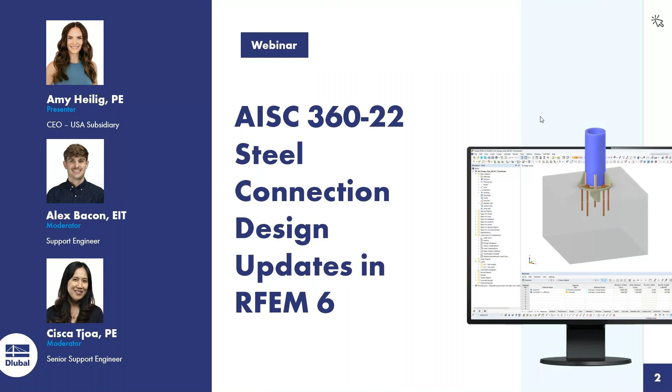So regarding the content over the next hour today, I do want to give a brief introduction to the Steel Joints add-on for connection design within our program RFEM 6. We'll talk about several of the new features and design options available, and then we'll move on to our examples. The first one will be a steel carport. We'll go ahead and design several different connections showcasing some of those new features.

Our second example is going to be this steel platform shown over here on the right-hand side. So throughout these two examples, we'll talk about the connection component and data input. Of course, we'll run the calculation and take a look at the analysis and design results as well.

So for those of you joining today that are not familiar with our program RFEM, we do work with this add-on concept. So RFEM is the base program. This allows us to fully model our structure, whether it's steel or some other material type. We can integrate with BIM software and we can get a full static analysis. But when we want to carry out the design of our steel members according to the AISC or the CSA standard, we will need the additional Steel Design add-on.

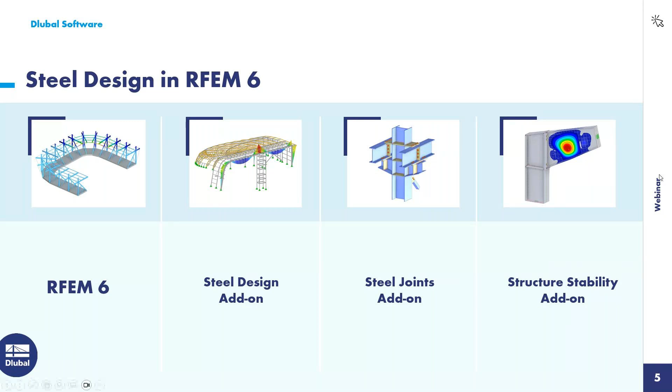So we'll give a brief introduction to the Steel Joints add-on. Now, I'll preface that this will be very quick just for what we have time for today, but there is a previous webinar that is linked here in the PowerPoint that will go into a little bit more detail of the basic functions within this add-on for new users. So you can certainly refer to that here.

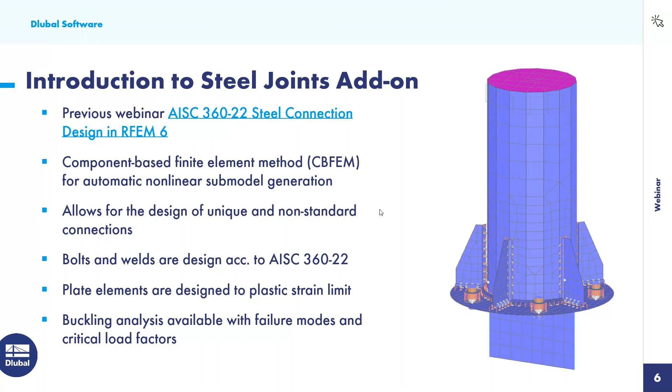The bolts and the welds are designed according to the AISC 360 standard, while the plate elements are code independent, but they're designed to the plastic strain limit. Now, as mentioned, the buckling analysis is also available where we can take a look at the failure buckling modes and the critical load factors and determine where we maybe need to apply stiffener plates.

So we might be wondering, what are the benefits of this particular add-on over other connection design programs? So within the RFEM 6 Dlubal Center, we have access to an extensive library with standard connection components. This means that if we do have a pretty basic connection, we can always go to our library and insert these components automatically to apply to our model.

But we can always build up our own non-standard connection type as well with individual components. We'll certainly see these two options in our examples today. We can save that then to our library for future RFEM use. We really pride ourselves in having a transparent output of our design checks.

So within the welds and the bolts, for example, as you can see over here on the right-hand side, you can see a line-by-line output of the code equations, the code references, and ultimately how we determine that design ratio. But even more so, you can actually download the submodel that we've generated underneath the hood for this connection and open it up like we would any other RFEM model.

We can also calculate the true connection stiffness, so the axial and rotational stiffness of this connection, and we now have the ability to automatically export this stiffness back out to the global model in RFEM for the member end fixity.

And finally, this leads to the design of the members and the connections in one file. We no longer have to export out member end forces to a third-party program every time the model updates and re-export out those forces, but rather everything is working together again in one file.

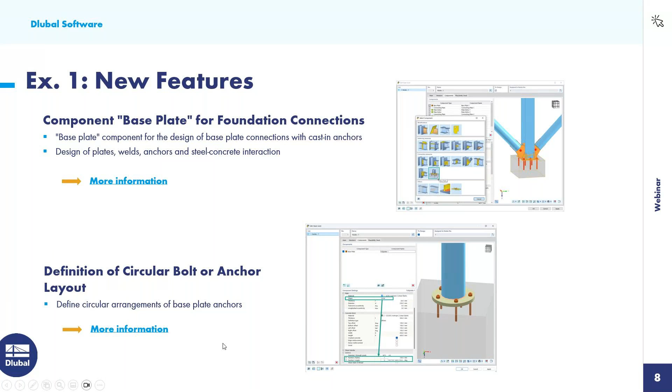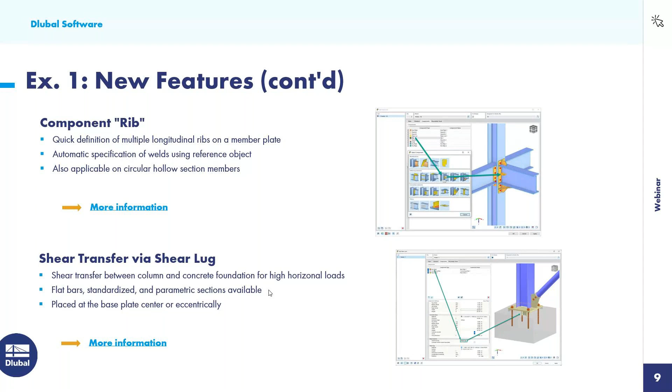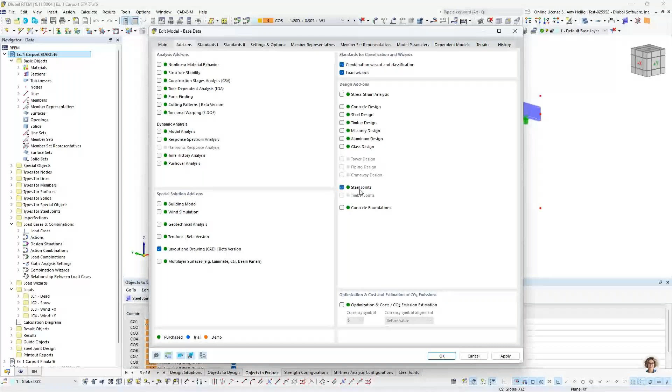Okay, so we'll go to the program RFEM here to begin our first example. So before we begin, we are in our base data dialog box. This would be the initial dialog box when we create a new model, and under the second tab are all of the various add-ons that we have available in addition to the base program. And for this initial example, we do want to activate here this Steel Joints add-on. So jumping to the third tab, this is where we can set our standard. You can see here the AISC 360, the latest 2022, is available here.

So now we're within the main program RFEM, where I have already taken the liberty here to model this general steel structure. And this might be some type of carport where we have our columns supporting the steel structure up here at the front, but maybe in the rear, you'll notice some nodal supports here. Maybe this carport is attached to an existing building, such as a concrete wall. And just general AISC cross sections as well as materials have been applied here.

So we'll take a quick look at the loads as well. So you'll notice that I'll display our dead load. And if I right click here to display separately, this has just been an area load that has been applied through the load wizard over here in our navigator, where I can also right click to display separately to see those loads applied to the members based on their tributary area. A couple point loads as well for this particular load case.

Snow load, same concept here, just an area load. And then you'll also see here a couple of wind loads. These have been applied to these nodes that appear to be kind of floating out in space here, just to define the wind plane in both the X and the Y directions.

But again, using this load wizard, we have applied this load to an empty or an open structure, so we want it to only be applied to the cross-sectional area of these members themselves. And again, we can right-click to display these loads separately for wind in the X and wind in the Y.

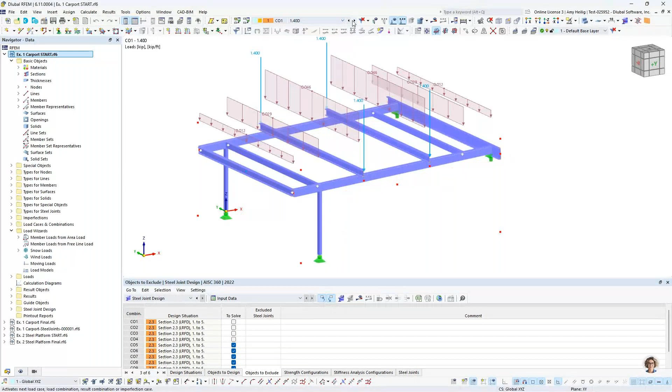All of these loads are combined according to the ASCE 7. We can see them displayed together here and taking into consideration the factored load combinations. So now that we have done a quick model review, we want to begin with our first connection.

So because we have enabled the steel joints add-on, we have a folder option over here to specify our first steel joint by right-clicking and creating a new definition type here. So the first thing to do in this dialog box is to select the nodes.

We want to go ahead and do a base plate design. We'll select the node at the base of the column, but if we want to do an identical design at the base of the second column, we can select both nodes at once. They don't necessarily need to be defined separately here.

So you can see that the program inputs in the members. For this one, we only have one vertical member. We'll call this one the columns. Under the members tab, again, we just see those vertical members and the relevant cross sections and materials brought in.

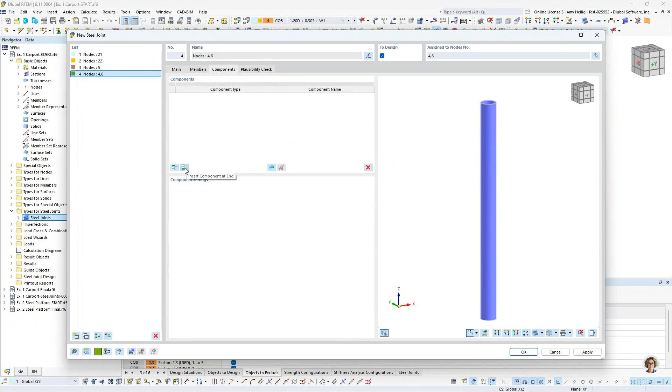Under the third tab, this is where we begin to build up this connection. So we will insert in a new component here from our component library. And one of the new features mentioned in the PowerPoint is going to be a base plate.

So when we insert in this component, we see it shown graphically here, but all of the information at the bottom will need to be revised to account for different materials and different geometry that we want to make for this particular connection. So we'll begin here with the base plate itself.

We want to select the steel material A36 that's already been defined here within the model. If we needed to, though, we could always visit our material library within RFEM.

So we access the material library here. We use our filters over on the left to filter to AISC, and we see all of the relevant steel materials if they haven't already been defined. But in this case, it has, so we can simply select it from our drop-down box here.

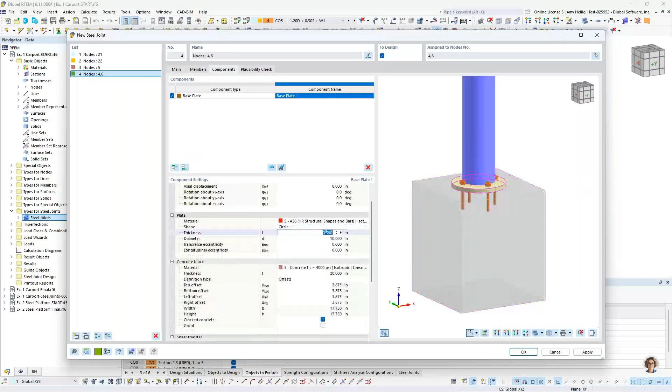Now, rather than a rectangle, we want to modify this to a circle. And the thickness of our plate will be 0.5 inches. The diameter will remain at 10 inches.

And then we're ready to jump down here to our concrete block. So the concrete block material is 4,000 PSI. The thickness is going to be modified to 18 inches.

Now, rather than defining offsets, I'm going to toggle this to defining the dimensions and position directly. So this way I can set the width here to 24 inches. The height will also be 24 inches. We can set an eccentricity, but we'll go ahead and set this as 0.

Now notice we also have the ability to turn on or off if the concrete is to be considered cracked. And with the cracked concrete, this is just going to affect the modification factors that will be used in our design of our anchor, specifically for anchor concrete breakout. We'll go ahead and leave this cracked for today.

Now we also have here the grout that we could turn on or off if we had a grout layer in between the plate and the concrete block.

Under the shear transfer, using this drop down, we can select our new option here to define a shear lug. Now, additionally, I could specify if I wanted to consider friction under the base plate, so if I wanted that base plate to take some of the shear forces. Otherwise, if I leave this unchecked, we'll see most of the shear forces within the shear lug itself.

So as far as the material for the shear lug, we want to select A36, again, available in our dropdown, and we do need to define here a new cross section.

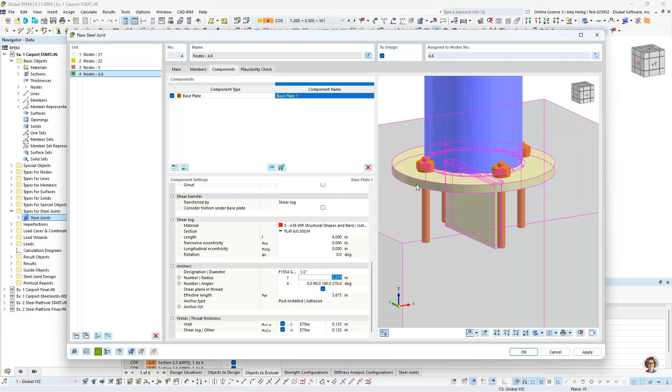The spacing, though, you'll notice we have an issue where it's colliding here with the wall of our HSS member. So therefore, we want to modify the radius to 4 inches, and now we see that anchor move outside that area.

Instead of a total number of 4, we're going to increase this to 5, and the program will automatically space these evenly around the circumference here of the base plate itself. So that all looks good.

We want to define whether the shear plane is located in the thread or not. We can go ahead and uncheck this for today. And we can also modify the effective length of the anchors themselves if we'd like to 8 inches.

Finally, we have the ability here to define the throat thickness. This would be the weld from the HSS to the base plate itself, and we'll go ahead and set this as 0.177 inches.

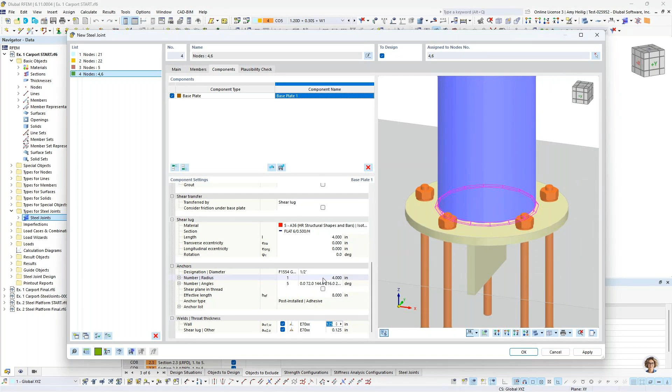A nice trick in the program is if I hit the down arrow key and simply hit F8, that's going to copy the cell above into the current cell. So that might just be a nice quick time saver for you as well.

Now we want to insert another component here to this connection type, and this is where we're going to take advantage of this new component rib that we also mentioned in the PowerPoint. The stiffened object is going to be the member plate, and within our dropdown, we want to select the column wall. The type of reference is also going to be a plate, and we want the reference to be the base plate itself, that circular base plate.

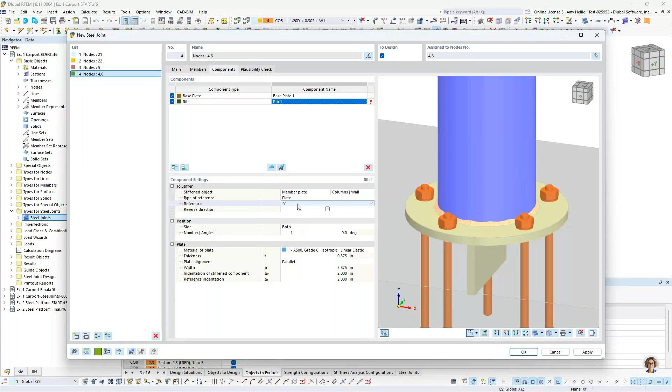We see here that that first rib was automatically generated, but clearly we need to make some modifications here to the geometry and the placement.

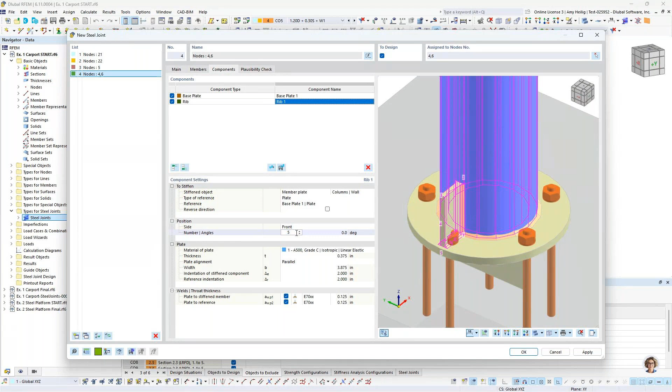So we want to create these ribs, and you'll notice the default here is to set this on both sides of the HSS. We only want to set this on the front side, so we'll go ahead and make that change here, and we want a total number of 5 ribs. The program will create the 5 ribs, but again, we have conflict here with the location of our anchor bolts.

So we'll go ahead and set the first angle at 36 degrees, and if I just simply hit enter, the program's intelligent enough, again, to space those ribs out evenly between these anchors. Now, the plate element would be, again, A36 for this rib.

We could modify here the thickness to 0.25 inches. Rather than being a parallel rib, we can use our dropdown to change this to inclined. With the inclined, we see the geometry update graphically, but we need to modify the width to 4 inches. The height will be set to 2 inches.

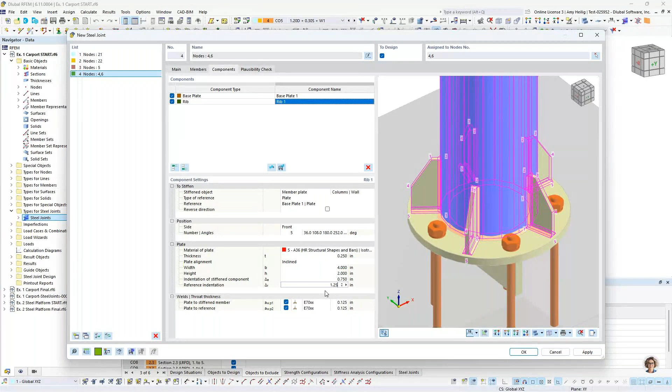And then we have the indentation of the stiffened component. We're going to modify this to 0.75 inches, and the reference indentation is going to be 1.25 inches. Finally, our last input here is going to be our weld throat thickness. We'll modify this to 0.177 inches.

Again, using that F8 key, we'll go ahead and copy that down to the second cell here. So that will be all that is needed for this first connection design of our base plate. Again, we could save this to our user-defined library and always reference it at a later time for a future RFEM model.

But going into the graphical display here, back into RFEM in the global view, we can control whether we're seeing these connections globally here in the graphical view with this button in the upper right-hand corner. So currently I have this set to no joint model, but we can toggle this down to a detailed joint model, and sure enough, what we're going to see here is the display of the base plate that we have just defined.

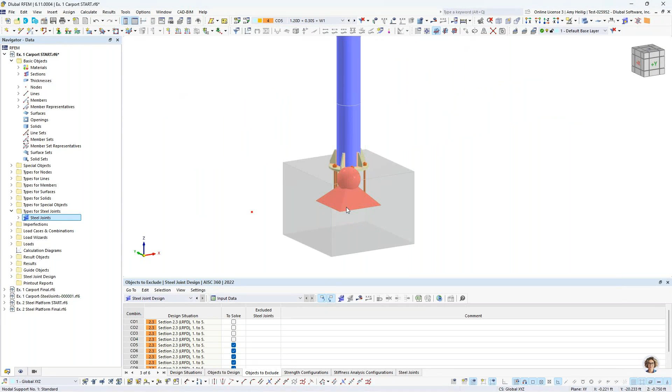Now you'll notice the nodal support's a little bit in the way. Of course, we need this for the global analysis of our members, but we can always toggle this off graphically if we don't want to display that here.

Okay, so we want to now move on to additional connection types here. I'm going to go back to the PowerPoint to explain a couple more new features.

Another new component is called fastener with anchor in the concrete block. The fastener we've had for quite some time, but we now have the ability to fasten these steel members into a concrete block. This might look familiar, like it's similar to a base plate, but this can also be used for connecting a steel member to a concrete wall, for example. That's maybe similar to what we have with our example today, where we want to connect this carport to an existing building - maybe that's a concrete wall.

We also have a new component called contact. This is in the situation that we have the connection of two members, but not through fasteners - rather, the top beam is just simply resting on the bottom beam. With this new component type we need to consider the nonlinear pressure contact between the two parallel member plates, meaning that in uplift, we want this connection to fail, but in downward compression, we would expect this top beam to bear on the bottom beam. There's also the optional consideration for friction between the two surfaces for those shear loads acting on this connection type.

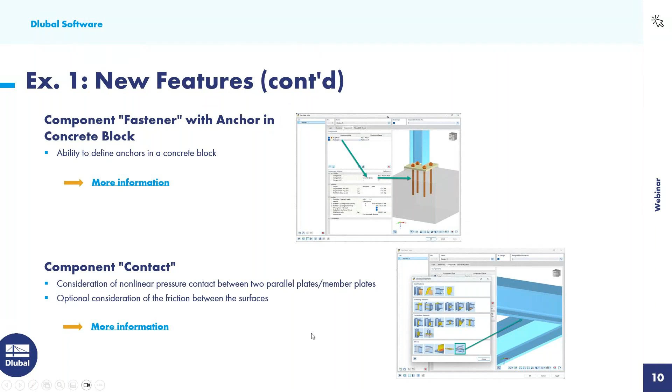So we'll go ahead and jump back to the RFEM model here to talk a little bit more about these two different connections. You'll notice that I have already defined here that new fastener connection type that will essentially be bolting this channel member to the concrete wall. So let us take a look at this definition type here.

This is for nodes 21 and 22. Now, in this case, I could not define the nodes together in one definition type because they share the same member. So we'll have to create two separate definitions, but it may be worthwhile to define here the first connection at node 21, and then using our button in the lower left-hand corner here, you can make a complete copy of a connection and then just make minor changes to the geometry for node number 22.

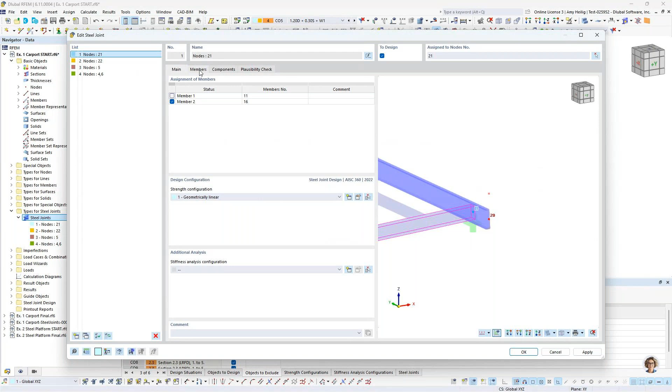Now, what typically would be brought in here is also this transverse member, but I'm not interested in designing for that connection, so I can simply uncheck it here. And now we just have our single member that is listed here under the second tab, member number 2.

Under the third tab is our components. So we would insert a new component of the type fastener, which I've already gone ahead and done here. We are going to reference component number 1 to the member plate - this is going to be the web here of our channel.

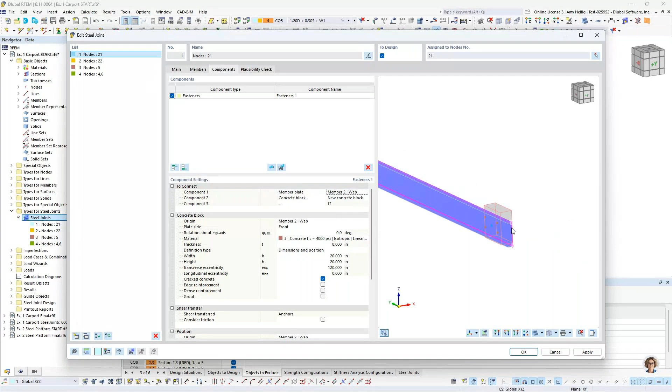The second component is going to be a new concrete block, and that's what you're seeing behind the member shown here graphically. The concrete block should look very similar to what we just saw with the base plate. We define here the material, the thickness, the width, is it cracked, does it have that grout layer, and so on.

Now we also have the shear transfer. As I mentioned, we can consider friction here if we wanted to. And then ultimately we're going to also place the anchors. So I have 2 rows and 2 columns here of anchors, both in the longitudinal and transverse directions.

We set the spacing based on the member end. So you can see here the first spacing is set at 2.56 inches because it's referencing the end of the member on the left-hand side.

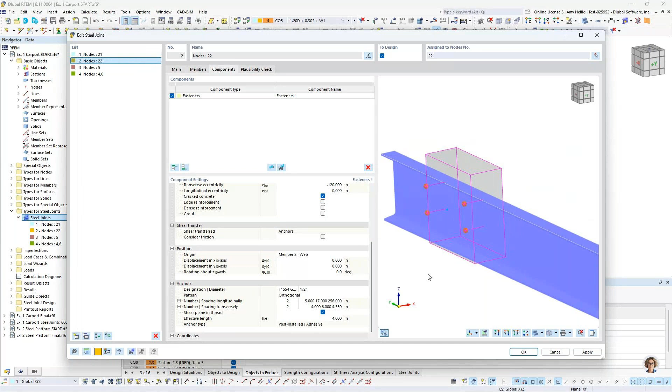So once we have all of this information input for our connection on the right, again, we could just make a copy of that and just modify maybe the offset, the location here of these elements for the left side of our member. So now that this connection is complete, we see them again displayed graphically back here in RFEM. We will create a new connection type while we're within this dialog box.

So for this one, we want to graphically select here this node that is shared between this top beam resting on this HSS member. So I can graphically select that commonly shared node, number 9. Well, when I do this, you'll notice that graphically, I see all 4 of these members. So I did have to break apart these members into smaller segments, but that's no problem for the connection design.

Under the Members tab, we just want to make sure that we toggle this rather than being of the type ended, that it's of the type continuous. So that will tell the program that it will detect that this is one continuous member at the top and one continuous member at the bottom. Now, you'll also notice here the supported ends.

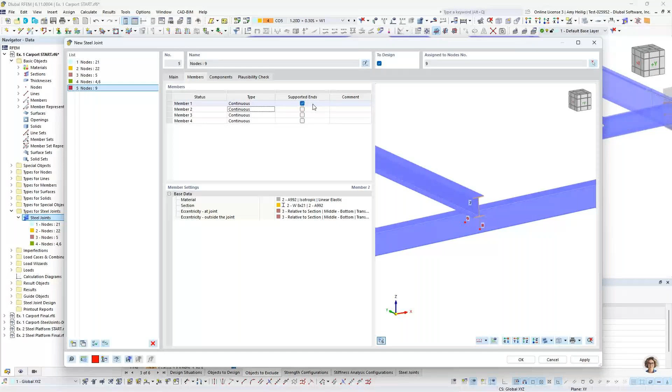So it's important to understand that we are generating this FEA submodel underneath the hood. It is completely separate from our model here in RFEM. So therefore, we're going to extract out these members, but in order for it to be in equilibrium, of course, we have to support at least one of these members. So in this case, I'm going to support member number 3 here.

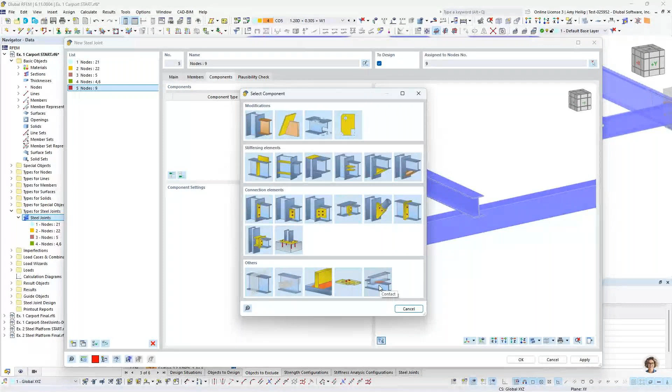And finally, we're going to visit our components. So for this one, I'm going to create a new component, and we have the new type here called contact. So when I input in this information, this should be pretty straightforward, not too much information to input down here at the bottom. Our first component in contact is going to be set to the member plate.

And within my second dropdown, you'll notice that the program will go ahead and highlight here exactly the elements that I want to consider within the dropdown. So we want to choose here all the way down closer to the bottom. We would like to choose member 2 or 3, flange 2. Again, we can see that highlighted here. The second component is also going to be a member plate, but this time it's going to be members 1 and 4 and flange number 1.

And again, what the program is going to do with that submodel is to create that nonlinear contact behavior all automatically underneath the hood, considering that this member is resting on the HSS element itself. Now, if we wanted to consider friction for those shear forces, we could go ahead and activate that and input in our friction coefficient here as well.

All right, so we will want to move on now that we have this final connection here that we've defined to our last connection type that has already been modeled here. So let me go back to the PowerPoint to explain a few more new features. The next new component is called stub. So this allows us to extend a member with another stub member. And we can connect this member based on an offset from a reference member, give it a length here. And the stub member doesn't necessarily have to have the same cross-section or material. It could be completely different.

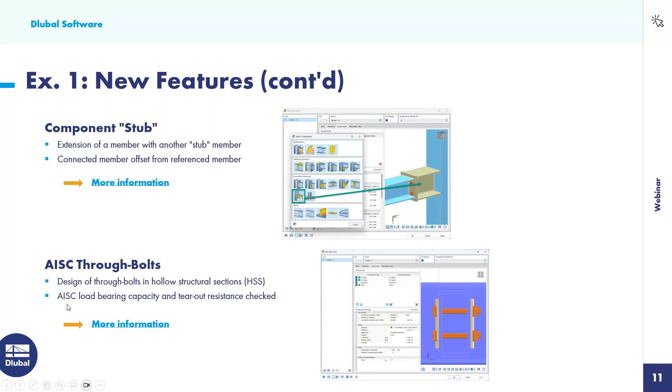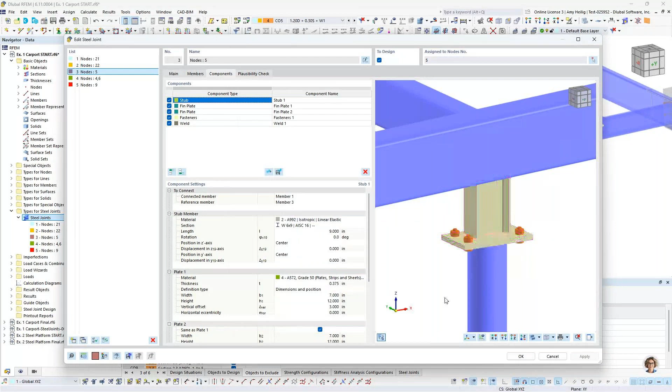So going back to the RFEM model, once again, we can see that this connection has already been defined here. So we'll just quickly go through some of the elements. Under the components here, you'll see the new component type called stub. So we could find that here in our library. Here's the new stub component. And with this, we will just simply define our material of our stub member. In this case, it's going to be A992. The cross section is a W6x9, but we can always define here a new cross section directly from the RFEM library. We would want to also specify the length here, and then that stub member is created.

Now, what's nice is that you'll also notice these plate elements and these bolts that are defined here. This is all done within the same component. I don't have to define here new components for the plates, but rather you'll notice my plate is set to A572 grade 50 material. I give it a thickness, I give it the dimensions, and then my second plate can be set to identical as the first plate. We also have defined here the A325 bolts passing through these plates, as well as our welds and our throat thickness.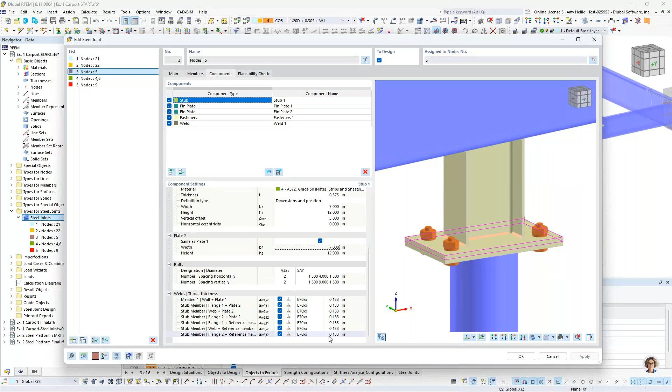And by the way, I also wanted to mention that the weld type is also available here in this dropdown. The default is the fillet weld, but we also have a couple other weld types like the butt weld available too. So that's that stub component, and that's really all that's needed to connect this column to this HSS beam.

Now, if I rotate this connection around, and I'll go ahead and turn this into a transparent view, we have a few additional components defined here. And the first is the fin plate. So we have a fin plate at the left and the fin plate at the right. Again, we're just giving it a material, the thickness, the dimensions, and telling the program where it's attached to. We don't have any anchors or bolts defined within this particular fin plate.

Instead, we define a new fastener component from our library. And this allows me to specify that both the fin plate and the wall of my HSS should be connected to the adjacent one with the bolts that I have designated here. So we have just one row, but we have two bolts located in the vertical direction. We give it the spacing and so on. So we can see those through bolts passing here. And finally, we have our welds that will connect the fin plate directly to the HSS element.

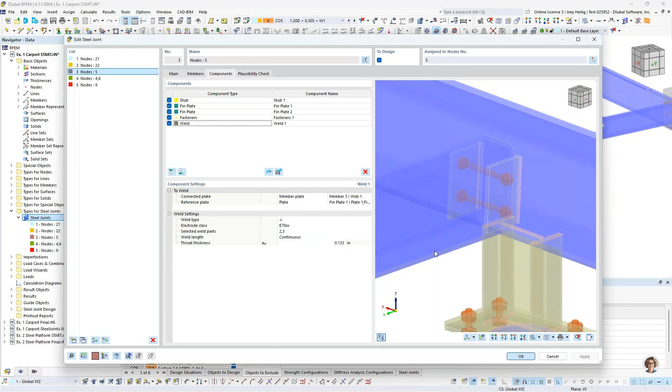Okay, so now that we have all of these connections defined, we're ready to run our calculation. And before we get into the results too far, we're going back to the PowerPoint yet again to talk about a couple new features related to the calculation and the results we're about to review. The first one is the life cycle of design results. So this is actually available with all of our design add-ons now.

And this is really nice because if we make any small changes to the model, regardless of design properties or settings or geometry, if we don't make modifications to a specific connection, then those results will not be deleted. So if we have two connections in our model and we've already run the calculation, we can make modifications to one of the connections and the geometry without deleting the results of the other connection. So this will be a big time saver when running calculations for something like the steel joints. The recalculation will apply to the invalid design results only, but the previously calculated results that are still valid will remain available to us in the program.

We also can view the graphical display of contact stresses for base plates. So we'll see in just a minute how we can now display those contact stresses graphically as you've seen here on the right-hand side.

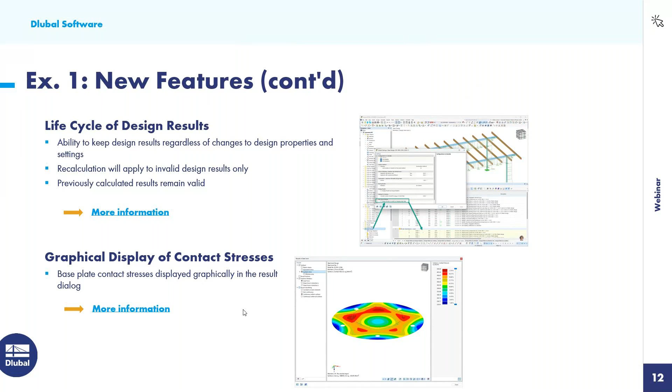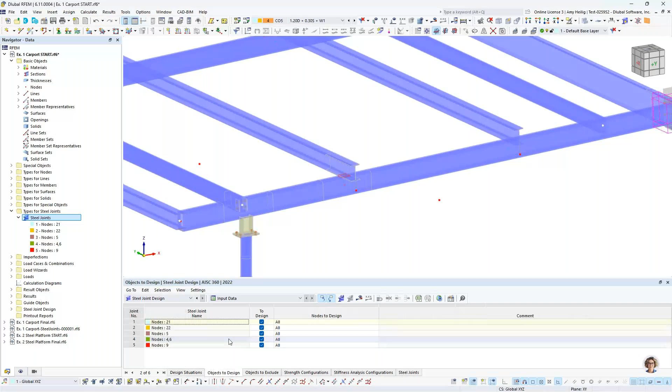Okay, so we will go back to the RFEM model and we're now again ready to run the calculation. So we jump down to the steel joint design within our table. And the first tab here is our design situation. So this is just our factored load combinations, where we tell the program we want to carry out the strength limit state design according to LRFD. The objects to design: we are going to design all connections that we have defined here. But the third tab lists each individual load combination 1 through 10.

And notice that you have the ability to uncheck load combinations. We are generating this submodel underneath the hood, and we are going to rerun each of these submodels through all load combinations. So it's highly recommended if you know some of these load combinations are not controlling, to certainly uncheck them here so that we're not rerunning them in the submodel, taking up more calculation time.

You also have the ability in this additional column to exclude certain joints from the calculation. So for example, load combination 9, if I wanted to exclude joints number 4 and 5, but still run this load combination for the rest of the connections, I can do so. Same thing maybe with load combination number 10 here.

The other thing to point out before we run this calculation is if we go into the global settings within the table, you see this new life cycle of results. So we want to ensure that this is turned off. This way we can make modifications to specific connections without affecting the results of other connections where the results are still valid.

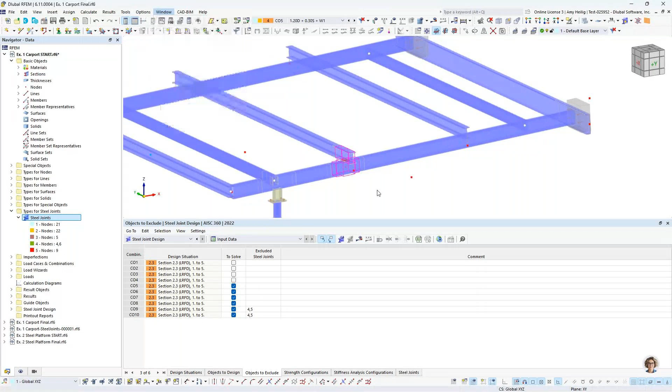So this is, again, that new life cycle of results. We want to make sure that that is unchecked. All right, so now we will drop to an already saved model so that we don't need to wait for this calculation to run. And when that is complete, we again are down here in our table format viewing the steel joint design and the stress strain analysis.

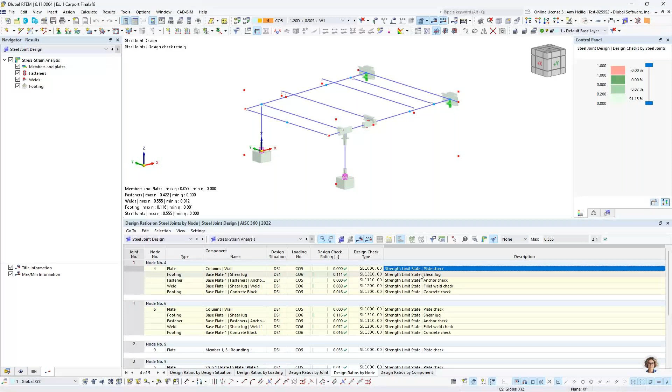And for each one of these connections, we can view the design ratios by node. So for our base plate, for example, we're going to see all of the design checks for our plates, our shear lugs, our anchors, fillet welds, and the concrete block itself. So if we zoom in here just to take a little bit of a closer look, with each one of these design checks as well, we can always access what we call the design check details.

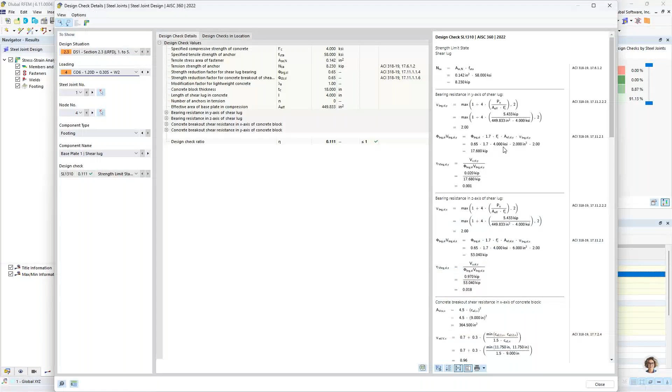And I mentioned this a little bit earlier in the PowerPoint. So this is going to give us the ability here to take a look at the design checks of the shear lug, for example, line by line with the formulas given to us here, along with the code references. And down here at the bottom is going to be the controlling design ratio based on all of these checks. So again, a lot of transparency here and trying to understand where these design ratios are calculated from for each one of these elements here.

Now, we also have access to what we call that submodel. This is just a graphical view of that submodel that's created. So we can see here the FE mesh. Again, everything's kind of happening underneath the hood here. We have the applied member end forces for this particular load combination.

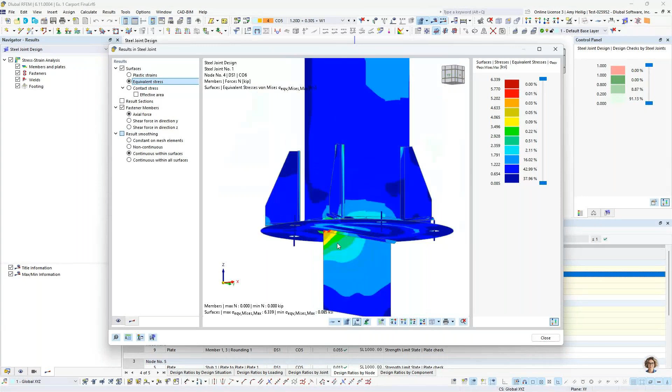And under this second tab, we're currently viewing the plastic strain. So not really much going on here, but we can toggle this to the equivalent stress. So we might be interested in seeing the higher stress points of this connection, wherever that may be. In this case, it's around the shear lug.

I also mentioned in the PowerPoint the ability to view that new contact stress directly on the base plate itself. So we can toggle on the effective area, 0.53 square feet, or we can just view the contact stresses directly here along with our color format over on the right-hand side.

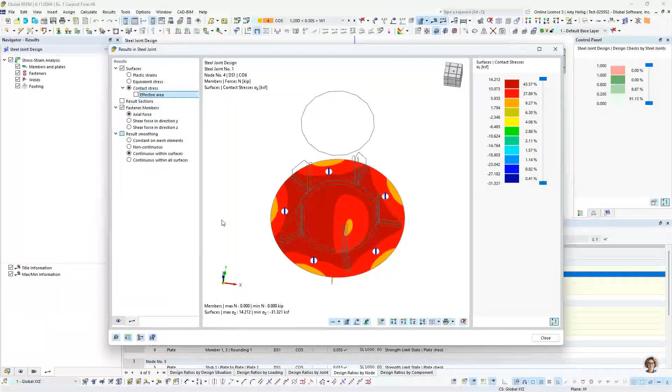Now, we also have the option for this particular model to save it to our computer. So I mentioned this also in the PowerPoint that you can save this model and open it up like any other RFEM model. So we'll go ahead and just take a quick look at what this base plate design looks like underneath the hood. So when you open up this saved connection, this is going to replicate all of our connection components. Everything is a nonlinear material.

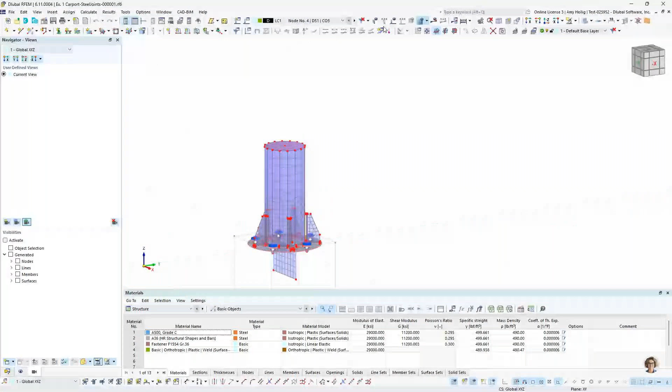We have a lot of geometric nonlinearities as well that are taken into consideration, but all of the bolts, the welds, the plate elements are modeled with the relevant FE mesh size, again, all underneath the hood. You can see here the member end forces through each one of these load combinations that the program is running through in order to come up with that design. So again, just a nice useful feature if you are interested in pulling up that submodel.

Now, the results are also available here under the steel joint design, of course, for our other connection types that you could take a look at here. All right, we will now move on to our second example by going back to the PowerPoint to discuss yet again some new features here.

So for our second example, we want to take a look at our new connection library in the Dlubal Center. So we previously had the connection library, but it was integrated directly in the add-on. So we just simply migrated that to what we call our Dlubal Center. So this just gave us better filter options, and we continue to add on to the options available here.

Now, we can directly access the library from the add-on to assign these predefined connections to nodes, and we'll just see how those components then come in automatically. We can make small changes to them, and that will be a little bit more time efficient. As also mentioned, you can save any connection under your user-defined connections located also within the library.

New as of this week, we now have the ability to export a 3D DXF from the steel joints. So this is very exciting as well. You can generate a DXF file from the connection geometry. And with this, 3D line models will be generated for each of these elements.

Then it's possible to open up this DXF, of course, in something like AutoCAD, but also other programs like Tekla. Tekla can accept maybe like a background layer of a DXF, so this will be helpful in kind of integrating RFEM with those other BIM type programs.

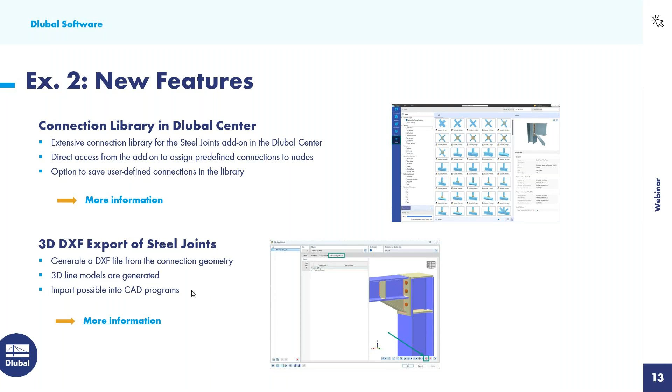And finally, we have the joint structure interaction. So we touched on this topic earlier, but we have the ability to automatically calculate the connection stiffness. We've had that for quite some time within this add-on, but what's new is that we have the ability to automatically consider the joint structure interaction, where we will take the stiffness properties of this connection, we're going to export

them back out to the global model, and these are now going to be new member hinges for our actual member analysis and design. So we're typically used to something being fully fixed or fully released with our member hinges. Well, now we can account for the true connection stiffness for the members themselves.

So we will go into RFEM for our second example today. We'll go ahead and pull it up here. And I will begin once again in the base data dialog box. So taking a look at this dialog box and under the second tab, again, we've activated the steel joints add-on, but I've also activated the steel design. So this is for the connection design. This is going to be for the member design.

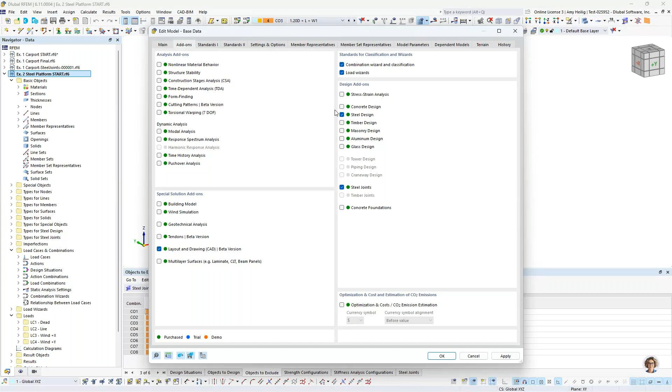And under the third tab, we can set the AISC 360, the latest 2022 standard, relevant for the member design, but we can still carry out the connection design, again, all in one file. So we will do a quick model review here. This is just a simple steel platform. Again, AISC cross sections, materials are all defined.

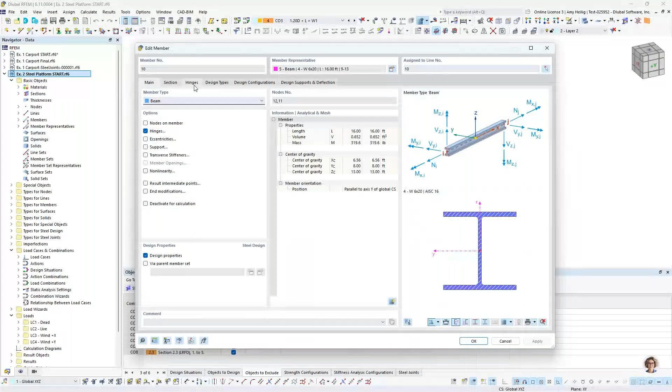You'll notice that these transverse members have a symbol shown here to represent the member hinge that has been defined. If I double click on this, we see the hinge definition turned on here, because by default, everything's considered fully fixed unless we activate this hinge. And in this case, I did just apply a simple moment release. So you can see here the 3 degrees in translation, 3 degrees in rotation, and I've released the rotation about the member's local Y and local Z axes.

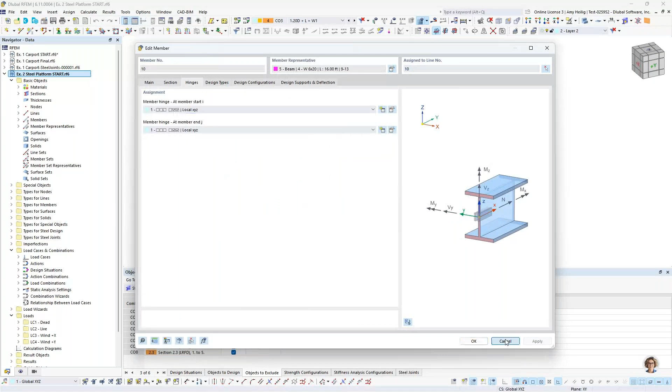Now, as far as our moment frame in the X plane here, everything is considered fully fixed. So this column connecting to this beam, connecting to this column, again, no hinges defined. Everything is completely rigid here.

Taking a look at the loads, pretty similar to our last example. We can display this area load. We have our dead load. Of course, we can right click to display this separately, and we can turn that back off for just a general area load. Graphical look, we have live load. We do have wind in the X. Again, taking a look at these loads displayed separately here. And then we also have wind in the Y direction.

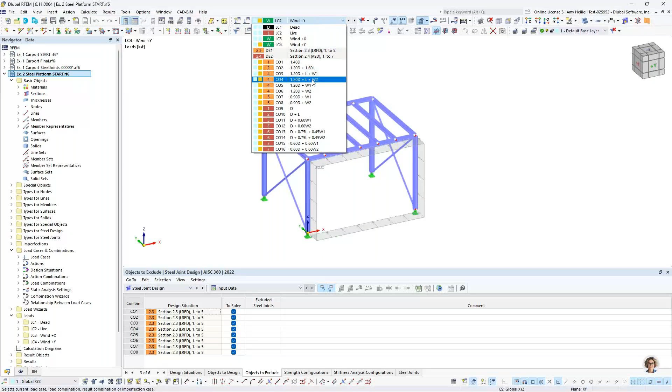So pretty basic loads. Now we have combined these according to the ASCE 7. So you can see in our drop-down box here, we have our factored load combinations, combining all of these loads. And then we also have our unfactored load combinations in red here. So again, we combine all of the loads with the relevant factors from the ASCE 7.

Now, before we move on to our connection, I actually want to carry out the design of some of these members themselves. So I jumped down to the Steel Design add-on, and let's take a look at our input data. So we have here our 2 design situations that just group together our factored load combinations. We want this set to an LRFD strength design. And then we're also going to carry out the serviceability design for deflection checks based on our unfactored load combinations from this second design situation.

Under the objects to design, I'm only going to design these 4 columns. So I've just graphically selected them here. I'm not designing any of the other members at this point in time. So when we run this calculation, we do get the results immediately shown here. And this is an overall envelope summary here of our 4 columns for our strength limit state design and our serviceability.

It's worth mentioning too that very similar to the connection design, with the member design we also have access here to our design check details, where you can see all of these formulas line by line and ultimately how that design ratio was also calculated according to the AISC.

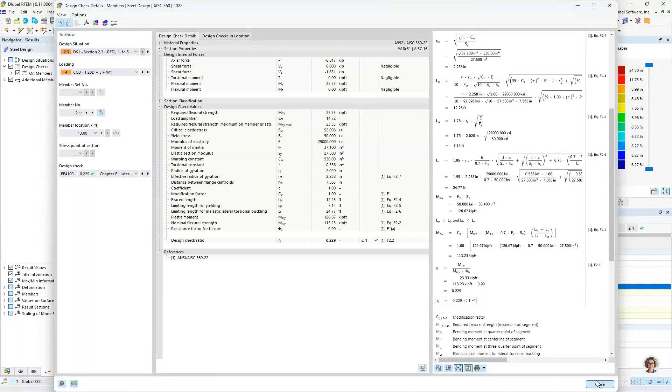So very transparent there as well. Now we're kind of assuming that maybe for this steel platform, it's holding some type of very sensitive mechanical equipment, and serviceability is really going to control here. So we've set our limiting deflection ratio to something very, very low, but we can see that overall these 4 columns are still passing even for serviceability, right below the design ratio of 1.0. So everything looks good here.

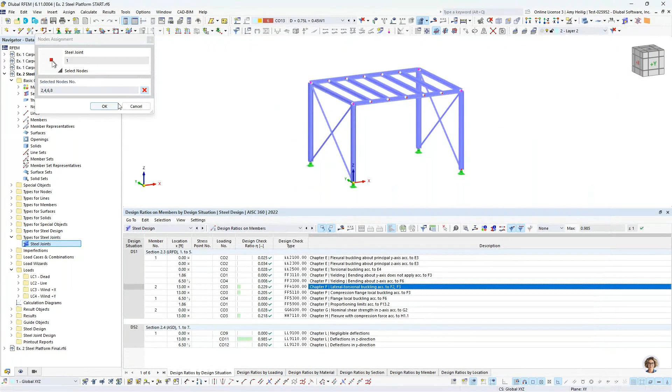So we now want to move forward with our connection design. And I'm going to go back to my navigator over here on the left. And again, very similar to example number 1, we have here the types for steel joints, where we can right click and create a new definition type. So we want to select the 4 nodes here at the top of our moment frame. And notice that I'm grouping these all together because they are identical connections. So this brings in all of the members at these particular locations.

Well, the first members here, we can rename this one to columns. And then our second set of members that are brought in, these are going to be our beams. Now, for the transverse members, I'm actually going to turn these off. I'm not interested in designing them for my connection. Same thing with my X braces. So notice we'll just kind of turn those off altogether. I'm only interested in designing this moment connection here from the beam to the column.

Well, down at the bottom, we have what's called here our stiffness analysis configuration. And within this dropdown, we have the ability to create a new configuration or edit the existing configuration that's here in the model. And if we take a look at this definition type, this allows me to automatically calculate the stiffness of this connection. Now, this first configuration, notice I have the joint structure interaction turned off. This is just simply going to give me the stiffness values once I carry out the connection design.

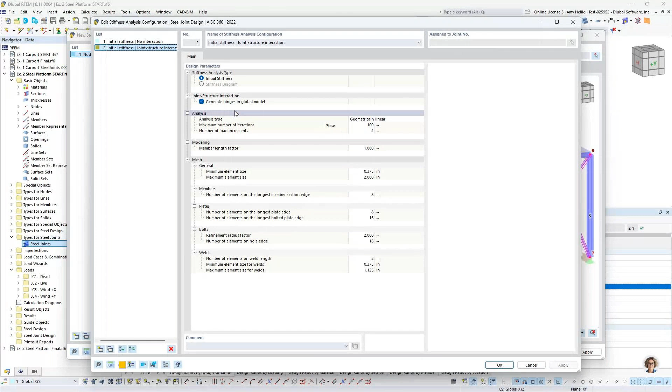But the second configuration has this option turned on. This means that it's going to export out the stiffnesses as new member hinges in my global RFEM model. And that's actually what we want to use today. I'm going to use my dropdown for that joint structure interaction to take place all automatically.

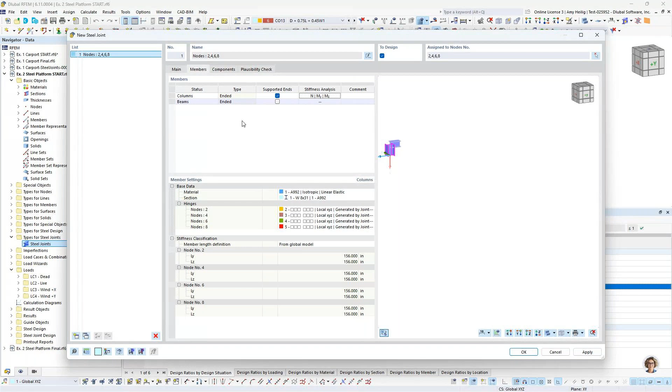So under my second tab here are my members. I have my columns. Again, we want to at least set one of these members to supported. But this is where I can set the stiffness analysis. So in this dropdown, I can say, okay, let's go ahead and calculate the stiffness, not only for the axial, but also the rotation if we wanted, MX and MY and MZ. So we can go ahead and turn those on. No need to do it for the beams. We're just going to do it for the columns here. So once we have this information input, we're ready to jump to our components.

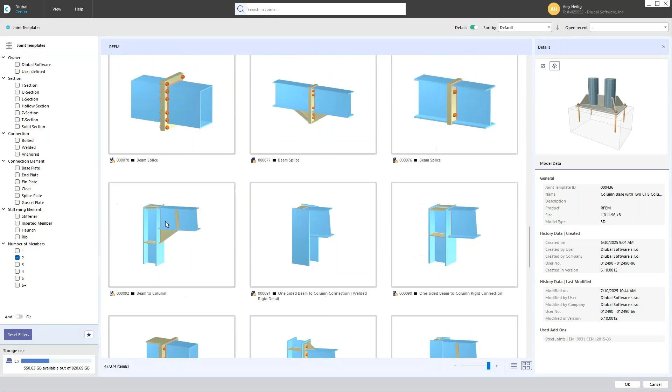And this is where I want to take advantage here of our library and to show you how we have moved this to the Dlubal Center. So within our library, you can see all of the various options that we have for pretty standard connections, including base plates, but then we get into our member connections. We can utilize our filters over on the left. Notice our user-defined filter is also available here for any connections that we've created ourselves and want to access later. So for this case, I want to set this filter to 2 members total. And I can scroll down here and I'd like to select connection number 92.

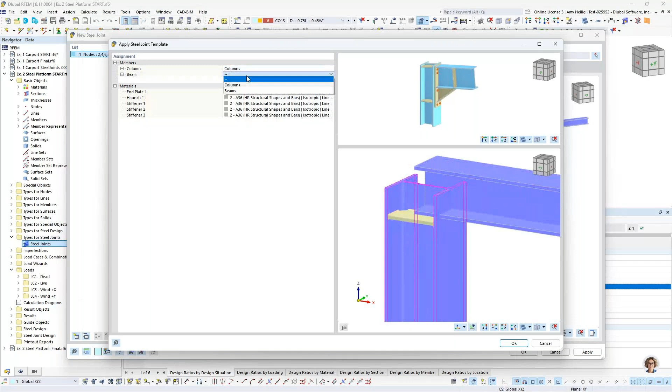So when I have the connection type that I'd like to apply to my model, I'll go ahead and click OK. And what this is going to do is to take all of these components that have already been defined and apply it to my model. And so we see this come in, and this certainly does not look great. Well, this is a quick fix here. We just need to reverse here what's the beams and what's the columns. So we'll go ahead and use our drop-down options here. And now those components have been applied here to the model.

Now, of course, we need to make some changes. The geometry doesn't look great, and we'll go ahead and do that now. You can set the materials of all of these elements directly here, or we could individually do it once we get into the various components.

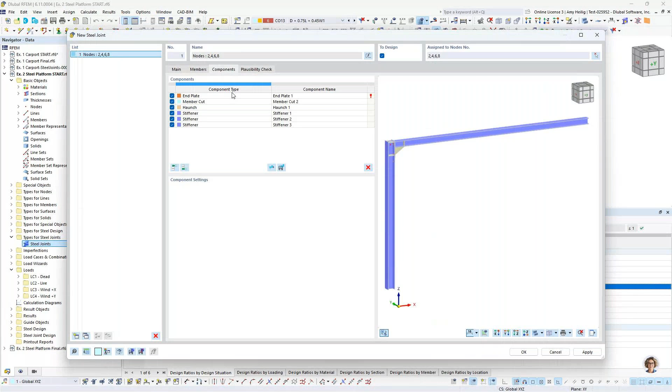All of these components are already defined automatically from that library. So what we want to begin with first is this top stiffener, and I'm actually just going to delete this altogether. This is the advantage of using the libraries: we can pull in these components, but we can make any changes we want, including adding new components.

In this case, I'm going to add a new cap plate. With the cap plate definition, we want to specify what is the stiffened member - it's going to be our column. The reference member is going to be our beam, and we want to toggle this to the option farther. Now we have our cap plate applied to the top of our steel column.

Now we want to make some changes to the material. We'll set this to A36. The thickness we'll leave as we have it set, but I am going to modify the option to dimensions and position. We're going to modify the width to 8 inches, the height is going to be 7.5 inches, and we want to set a small vertical offset to negative 0.25 inches. So we see everything update graphically here.

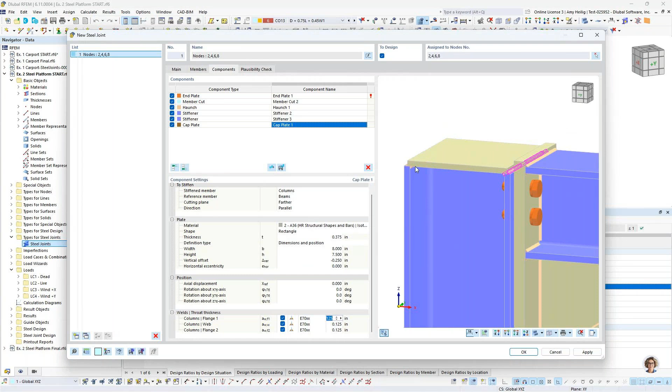Now, finally, we just want to set the throat thickness of the welds connecting the cap plate to our column. We'll go ahead and modify the throat thickness to 0.125 inches. We hit the down arrow key and then F8 to apply those modifications to the rest of the weld elements.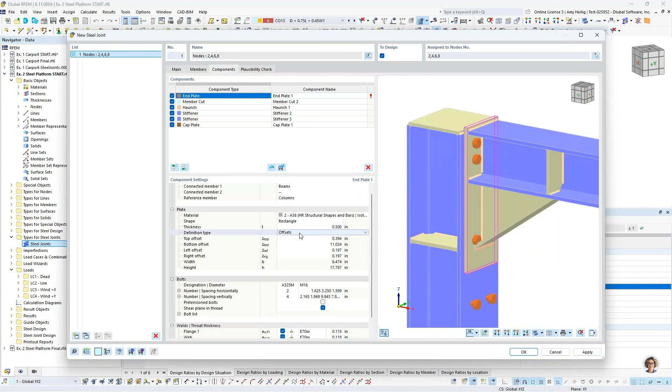Turning now to our end plate, we can see that it needs some geometry modifications as well. For this one, we want to modify the thickness to 0.5 inches, and I'm going to again select the dimensions and positions option. I'm going to set the width to 7 inches, the height is going to be 11.5 inches, and the vertical offset and horizontal offset will be set to 0.

So although it's bringing in these components from the library, we're most likely always going to need to make geometry changes unless we have identical members as what the library option does. So for this one, again, making changes to that end plate, this looks quite a bit better.

So our bolts are going to be A325, and we're going to modify this to 1/2 inch diameter. Now we want to have 2 rows in the horizontal direction, but I do want to modify the spacing. The first spacing input is going to be from the edge of the plate on the left to the center of my bolt in the first row - we're going to set this to 1.5 inches. I hit my space bar, and then set 4 inches for the space from our bolt to the second bolt on the other side. I hit enter, and the program will adjust those.

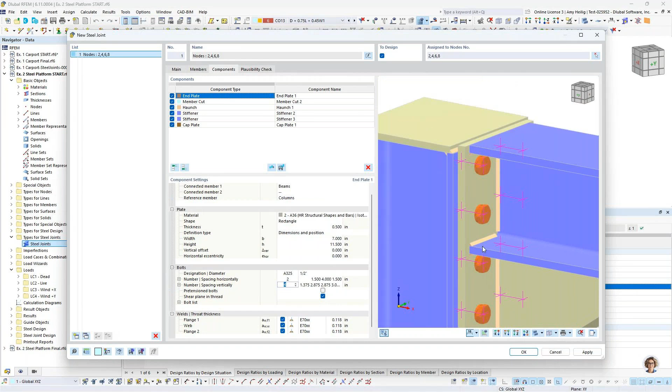Now, I only want to have 3 bolts vertically, and I'm going to set the spacing from the top of the plate to the center of the first bolt in the vertical direction to 1.75. I hit the space on my keyboard. My second spacing from the first bolt to the second bolt is going to be 2.5 inches. I hit the space bar, and my final spacing is going to be 4 inches, and I hit enter. Now the layout of those bolts looks quite a bit better.

If we want to specify pre-tension bolts or a slip critical connection, we can do so with this checkbox. Maybe the shear plane is not located within the thread - we can go ahead and turn this off. And finally, we have our welds. We want to modify the throat thickness to 0.133 inches, and we hit our F8 key to apply that to all welds. So that looks good, but let's move on to our additional components.

The member cut, we actually don't need this, so I'm going to delete this one altogether as well. And for our haunch, we want to specify the A36 material. I'm going to modify the thickness to 0.375 inches, and I also want to specify the width to 8 inches and modify the height to 4 inches. So that should look quite a bit better, intersecting with that end plate there.

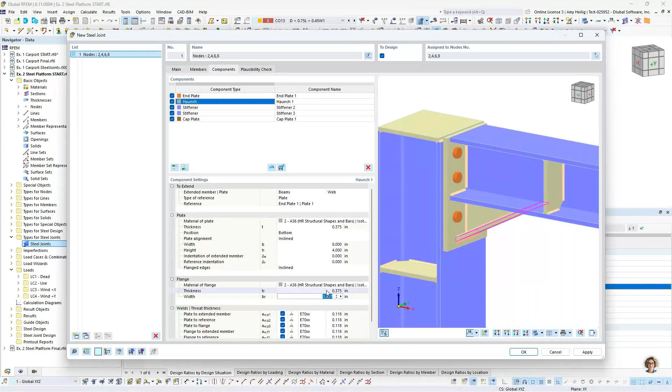And yet again, we have all of our welds, so we'll specify this throat thickness at 0.133 inches, and hitting F8 all the way down this row, we can specify that same length for the other weld types.

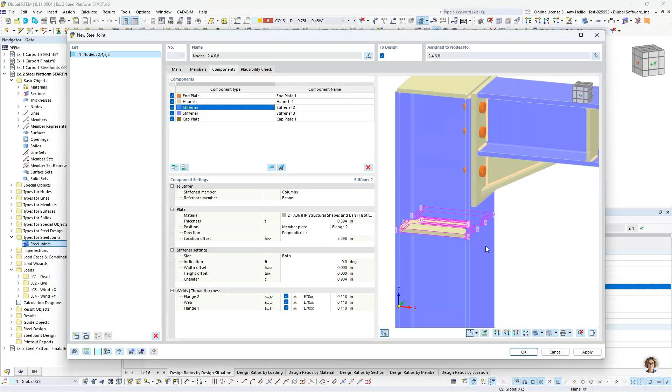Now, finally, we have our stiffeners. We have our first stiffener located on the left. Looks fairly good, but we need to move this further up in the column. We'll also make changes to the thickness, setting this at 0.375 inches. And I want to set the offset location, measured from the top of this column down to the center of the stiffener. We'll modify this to 4.5 inches, and now that looks quite a bit better.

We can also modify the chamfer for our weld access here to something like 0.75 inches. And similar to our other components, we'll modify the welds to 0.133 for our throat thickness, hitting the F8 key yet again.

Okay, so we finally have this last stiffener to take care of. Really exact same concept here. We want to modify the thickness to 0.375 inches. We also want to modify the offset, measured from the left edge of the beam, to something more like 13 inches, which brings it over to a much better location. Then looking at our chamfer thickness for that weld access as well, 0.75, and modifying our throat thickness for our welds to 0.133 and our F8 key.

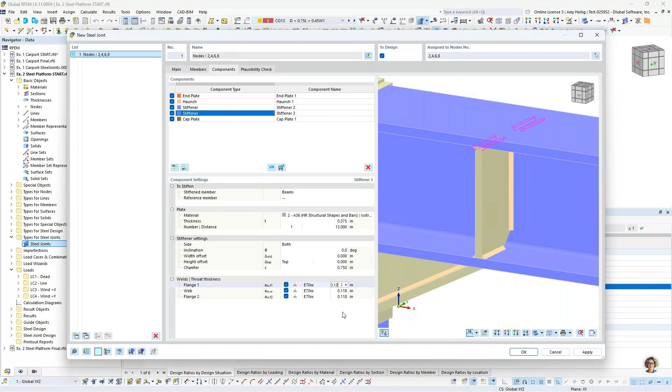So this connection is done, and you could save this here to your user-defined template. This will go into that library that we just saw. You could give it a name and a description, and you can always access this exact same connection with these same components for any other future RFEM models.

So the fourth tab, we really haven't visited yet. This is the plausibility check. This is a nice check when you are creating your connections - the program will warn you of any errors. So if you have overlapping members, or if we left this haunch connected directly to the member instead of the end plate, we would see those errors listed.

But also under this tab is that new ability to save this connection as a DXF. So we could save this in the lower right-hand corner. If we wanted to take a look at what it looks like imported into something like AutoCAD, you can see all of the various line elements shown here. Again, that was a new feature added just this week.

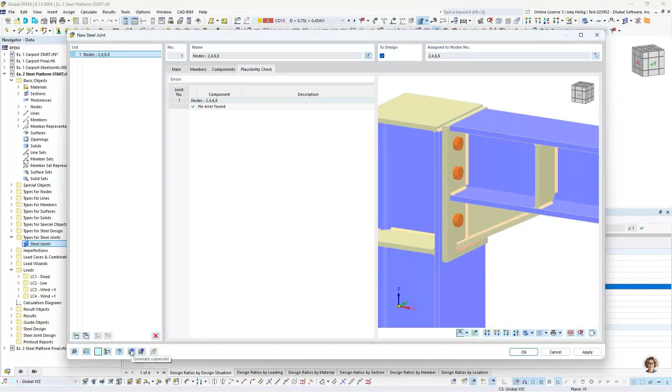You also can save that submodel within this dialog box. I showed you previously how to do that with example number 1 after we solve for the connection, but you can certainly save the submodel before running the results with our option available here.

Okay, so once we have this connection completed, we can actually see it applied globally to the structure. We can zoom in here and take a look at the connection components defined at all 4 locations. So we will jump here to the results.

And of course, we have carried out the steel joint design. Very similar to example number 1, we can visit the stress strain analysis to view the various design checks of the plates, the bolts, the welds.

But we also have an additional option in this dropdown called the stiffness analysis, because if you remember, we told the program to carry out the stiffness calculations of this particular connection. What we see within this dialog box for the column is the true stiffness properties in kip per feet. You can see here for the axial stiffness in the positive and negative direction, as well as kip feet per radians for our rotational stiffness.

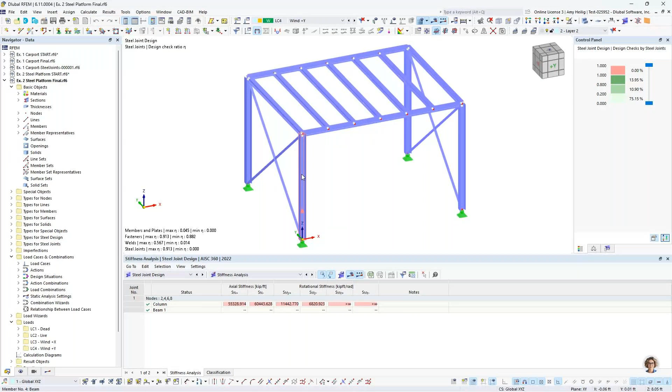So even more so, if I turn off the display of this connection and we go back into Rfem thinking more about the member design - if I double click on this column, you remember when we were reviewing the model, I said that I didn't apply any hinges to these column elements. Well, now you can see that this is automatically grayed out and turned on because the steel joints add-on has exported out the stiffness of this particular connection to the member itself.

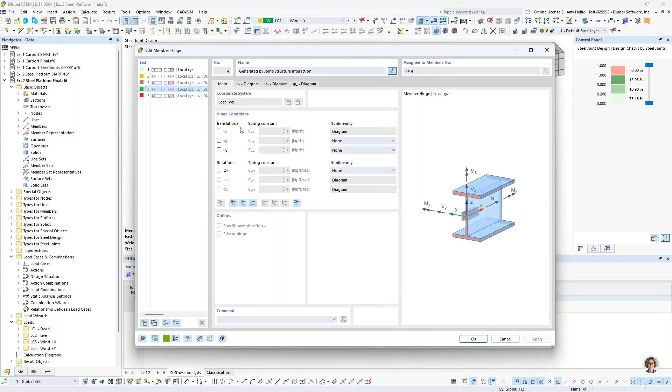And we take a look at this for translation and rotation. These are now set to the nonlinearity type diagram, and we can see this information directly input in here from the steel joints add-on for both our axial stiffness and our rotational stiffness.

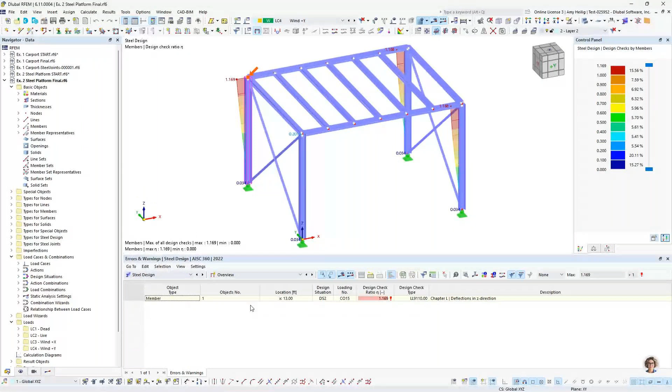So now if we were to carry out the design again of our steel members, not looking at the connections but the steel members themselves, and we take a look at our design ratios. Remember I had mentioned we're very sensitive to serviceability checks possibly for this steel platform. We now see that our deflection checks are actually failing.

So by taking into account the true stiffness of this moment connection from the Steel Joints add-on, we can consider that with the global model in RFEM. We carry out the design checks of the AISC, and now we see this failing design ratio flagging us, okay, we probably want to make some modifications here.

We probably want to make some modifications here to our structure if it is sensitive to those deflections. All right, so we will go back to the PowerPoint here to close out today's presentation.

I have listed a few additional new features here that you can review within this PowerPoint. We simply didn't have time to go over all of them today, but maybe one worth mentioning is this first one of adding dimensions.

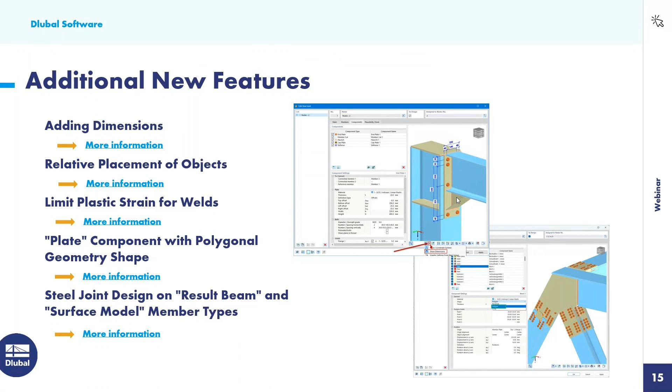So if you are working in the components that we just saw with these examples today, you can right click in the white space here to add dimensions graphically. This might be user friendly in just determining offsets and things like that, placement of anchors and components to help you out.

We're also working on topics like hooked anchors, so maybe you have a 90-degree turn here or 180. That will also be possible to define in the future. Also members with solid sections, so we want the ability in our submodel to define those solid elements like a round or rectangular bar.

For our Canadian users, we definitely know it's really important to get the Canadian standard in the Steel Joints add-on as well. So we're actively working on that to bring that to you guys, and we'll certainly keep you updated.

Another big topic is the standalone solution. We also recognize that not everybody has the interest to design the full global model, although that is an advantage. You can do individual connections by modeling a short member and applying member end forces directly to that element. But we want to develop a true standalone solution for connection design, not necessarily requiring you to model the full 3D structure.

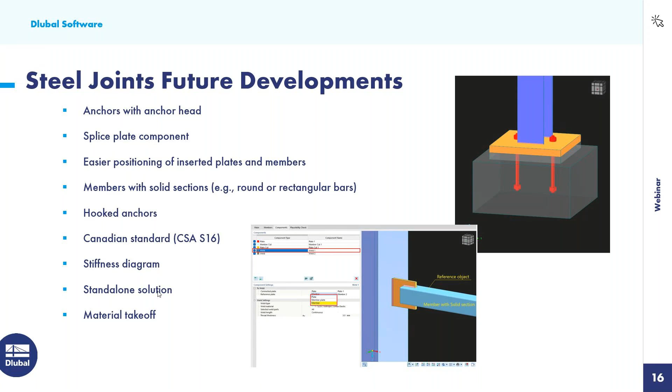So again, we'll continue to keep you updated as we carry through with these development features.